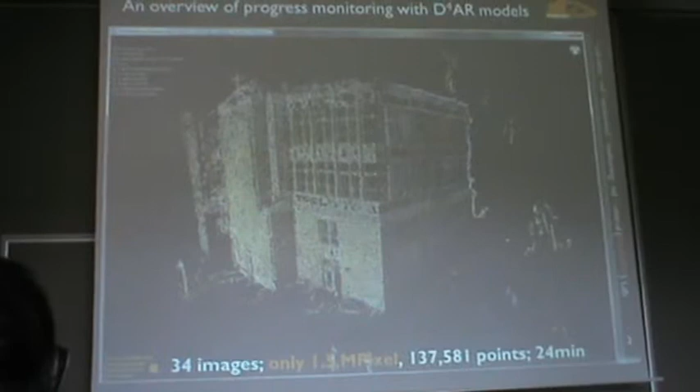What we can do is put these pictures together and give you a 3D point cloud model of the job site at the moment these photos were captured.

In this particular case, we're using a collection of about 34 images. The spatial resolution is about 1.5 megapixels. So you can imagine holding your cell phone, walking around this building and capturing photos, and we can generate a point cloud for you in 24 minutes.

Not only can we give you the point cloud, but we can exactly tell you where you took the photo from. In this case, you can see the camera frustum and the photograph superimposed on it. There's no GPS or wireless involved in this case. Everything is based on the visual content of the image.

Now the idea is to see how we can take this representation and compare it with the building information model and automatically analyze progress deviations.

I'm going to quickly speak about a few challenges that motivated this research. The specific focus of our work is on progress monitoring, and the issue we have is a pile of daily construction reports.

I'm sure all of you, when you walk into contractor trailers, this is the first thing you see: a pile of daily construction reports that contractors or construction management companies usually have one or two people analyze, to understand how much progress is being reported by different people.

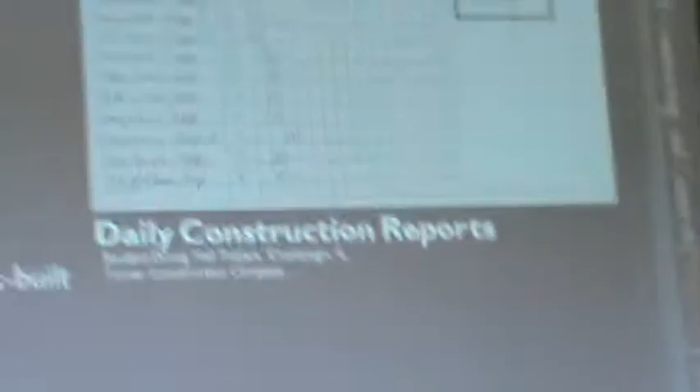Not only is the process very time consuming, but contractors aren't really providing a lot of information to us. Here's an actual example of a daily construction report provided to Turner Construction, the company I used to work for.

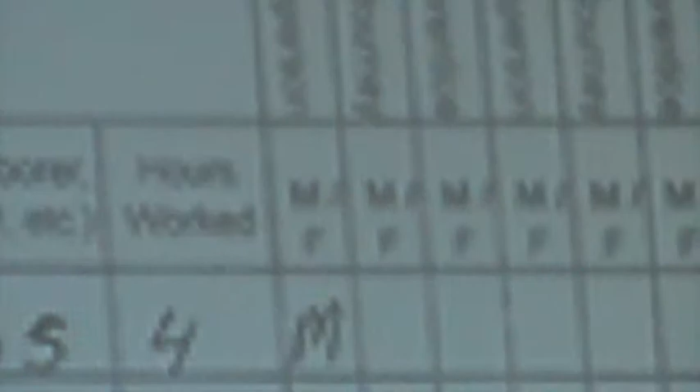In this case, the drywall contractor reported that they had been performing framing without exactly telling us the location of the framing, the cost of the work placed, or the amount of physical progress. And lastly, the way we visualize information is obviously very challenging.

In this case, we have a construction schedule consisting of 2,500 activities. You can imagine how much time you have to spend on a 3-week look-ahead schedule revision. Even the state-of-the-art representation of progress is just a discrete representation.

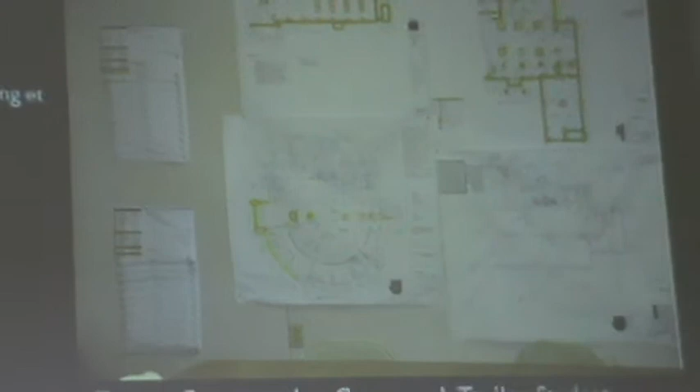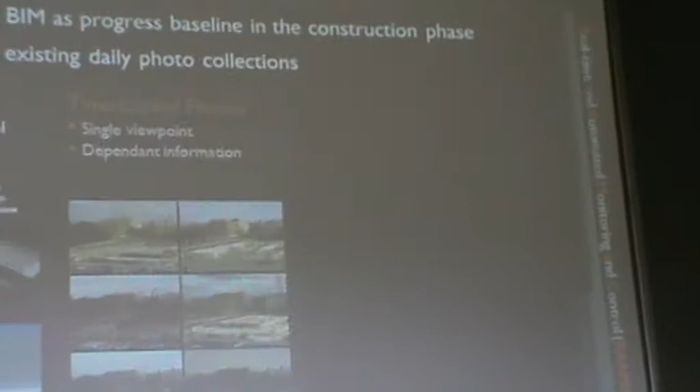Then you have the construction drawings on one side, the schedule on the other side, and there's no easy way to understand the level of progress. So the idea we've had is to see how we can use existing information on the job site without adding any new technology.

There's a lot of research being done on laser scanners, barcode and RFID tags, or wearable computers, but instead of looking into those technologies, our idea has been to look into existing information.

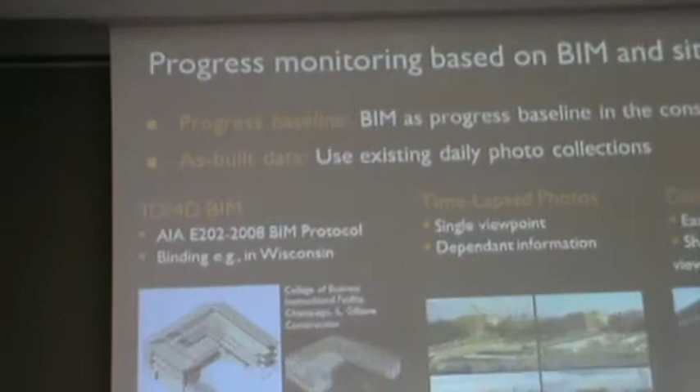By existing information, I mean application of building information models. At this conference, we've seen a lot of application of BIM for design, pre-construction, and lifecycle analysis of the building. This is perhaps another type, where it focuses on taking the BIM and using it during construction as a baseline for progress monitoring.

On the other side, we have two types of information. We either look into time-lapse photography as a technique, or we look into application of random photos, the photographs that everybody takes on the job site. So let me quickly explain the concept.

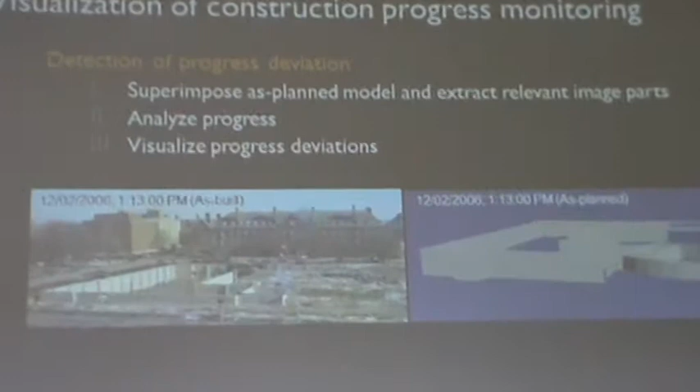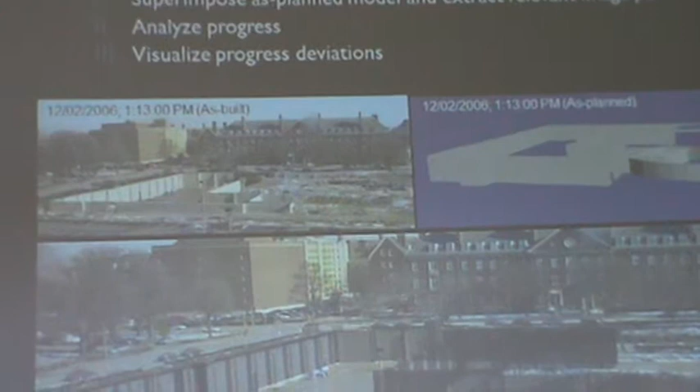Imagine that we have a 4-dimensional model where the BIM is already connected to the schedule. We want to take that model and superimpose it on the photograph collected on that particular project, and in this case we provide you with an augmented photo.

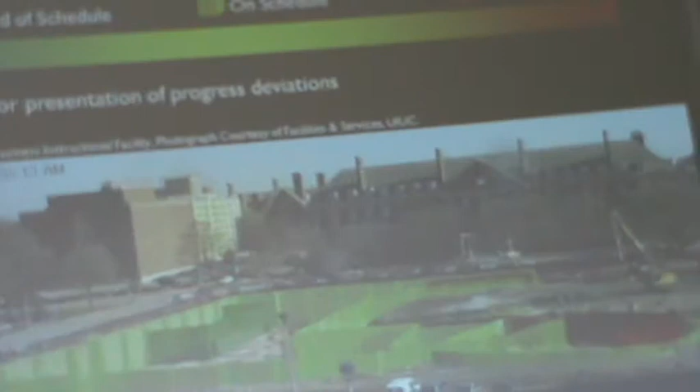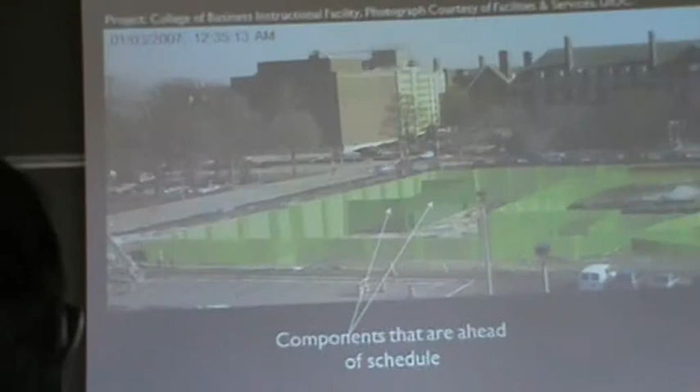Once you have the augmented photo, the idea is to go through the construction schedule and automatically analyze progress deviations based on different activities. Lastly, we give you one single representation of progress using a traffic light metaphor, color coding elements that are ahead of schedule in dark green, and elements that are behind in red.

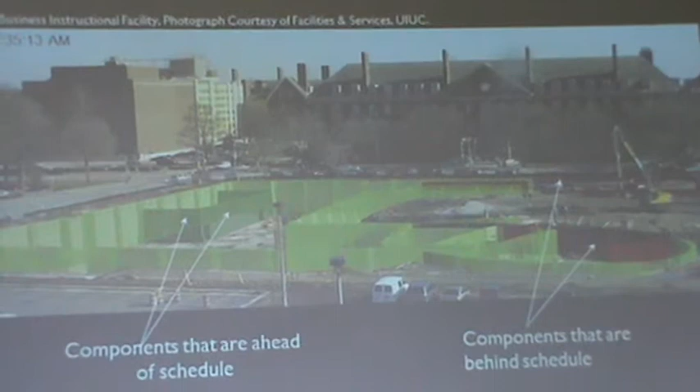When we started this topic, our focus was mainly application of time-lapse photography. But every time I presented it to different contractors, they always asked the same question: what is the cost of your technology? A time-lapse camera only costs about $8,000 to $10,000 per year to operate and maintain in the US, but it was still a concern.

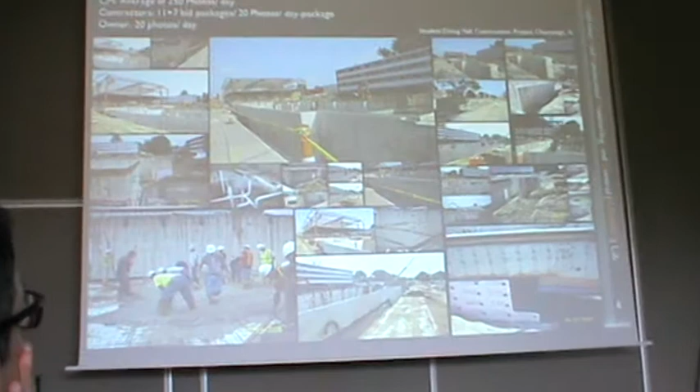So I decided to change the concept and see if I could use their existing photographs. Here's an example of the type of photographs already available to a construction management company, another example from Turner Construction. In this particular project, we were collecting about 250 photos on a daily basis, and not only were we collecting photos, we had contractors taking photos for us too.

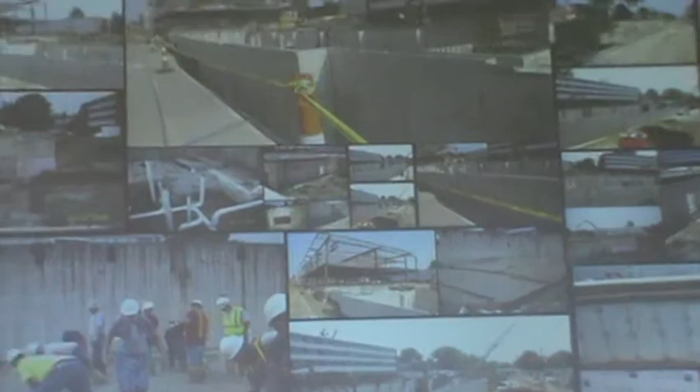In this case, it was actually a combination of 2 projects in Champaign, Illinois, with 18 different bid packages. If you assume you only have 1 team, and each team collects between 10 to 20 photos every day, you can see there are about 400 to 500 photos collected.

But actually using these photos is not that easy. We don't know how they were captured, where they were captured from, the lighting conditions, or the occlusions we have. Sometimes they're taken for safety analysis, like this one I'm pointing to right now. Sometimes they're captured for productivity analysis, or sometimes just documenting the quality of the work.

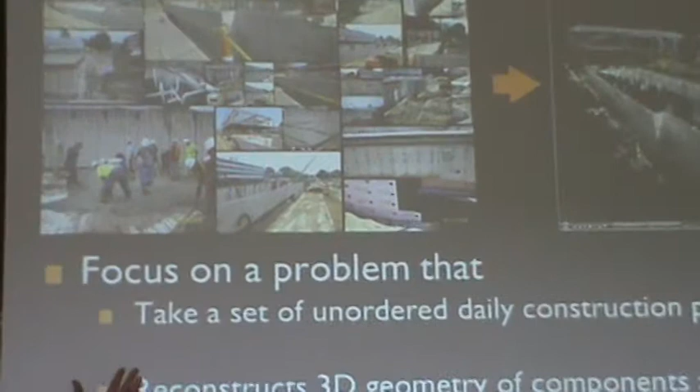So the challenge, or the specific approach we want to take, is to see how we can take this unordered set of photos, totally randomly collected, and turn them into a 3D point cloud model of the job site. Obviously, we're dealing with a lot of occlusions and obstacles because equipment and people are working on the job site, moving around and impacting our analysis.

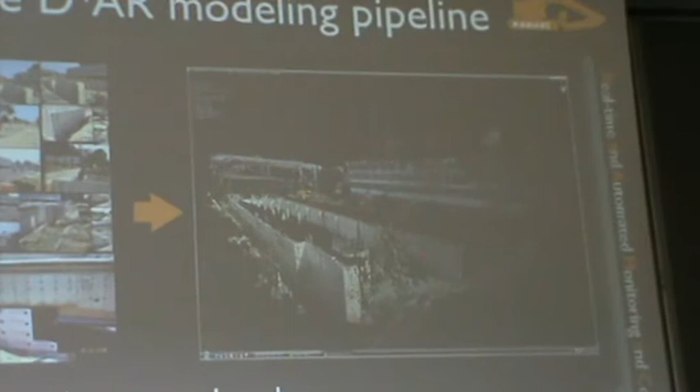So the system we've made is named D4AR, standing for 4-dimensional augmented reality, and it has 4 parts. The first part takes the set of unordered photos and turns it into a 3D point cloud model. The second component is creating and developing a 4-dimensional point cloud, meaning using photographs collected over different days to generate different point clouds and fully automatically superimpose these models over one another.

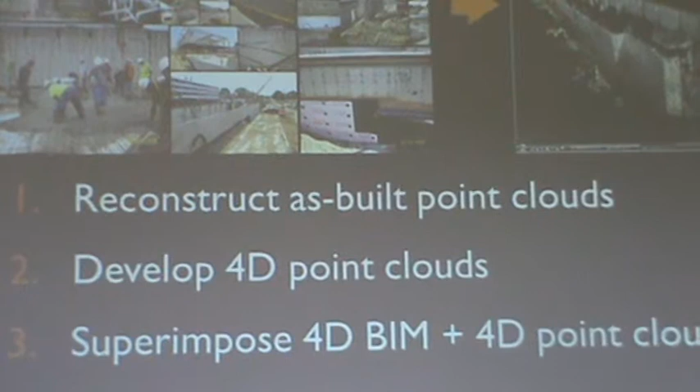The third step is to superimpose BIM over the point cloud, where the BIM shows you the expected progress and the photo shows you the actual progress. Lastly, you can automatically analyze progress deviations. So let me take it out of the presentation and show you a demo of the system.

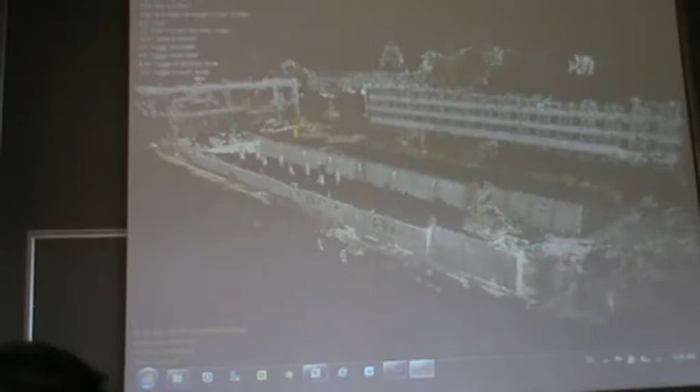Here's an example of the same site I was just showing you. This particular case is reconstructed using 160 photos, with a spatial resolution of only 2 megapixels. So you can imagine holding your cell phone, walking around and capturing these photos.

Let me walk into this scene. You can see the facade of the existing building, the construction equipment reconstructed—these were static the moment we were taking the photos. You can see the basement under construction, or even the steel structure already up for a dining hall project.

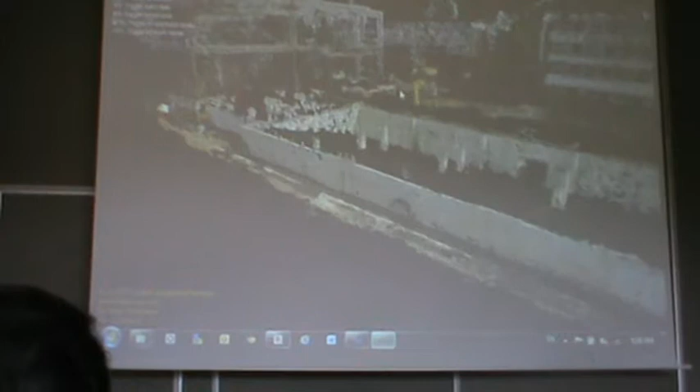Now I'm going to show you how the field engineer was walking and capturing these photos. The area I'm pointing to right now is where the field engineer started taking photos, and here's how that person was walking and capturing them. As you can see, this person is casually walking and taking a lot of photographs.

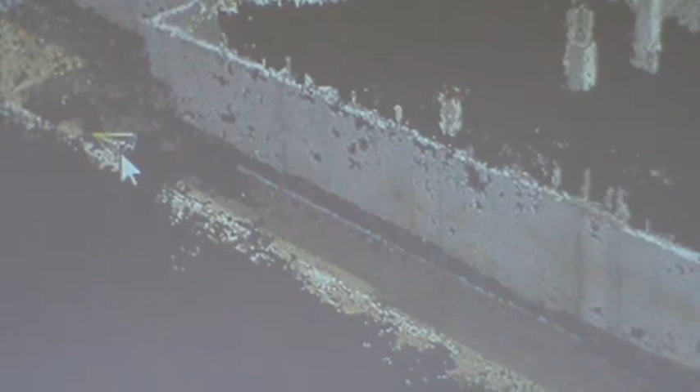We zoom out a little bit. Now if you notice the size of the camera frustum, this little thing is not changing. Here's the moment it changes—that means you can zoom in, zoom out, and capture whatever information you're interested in.

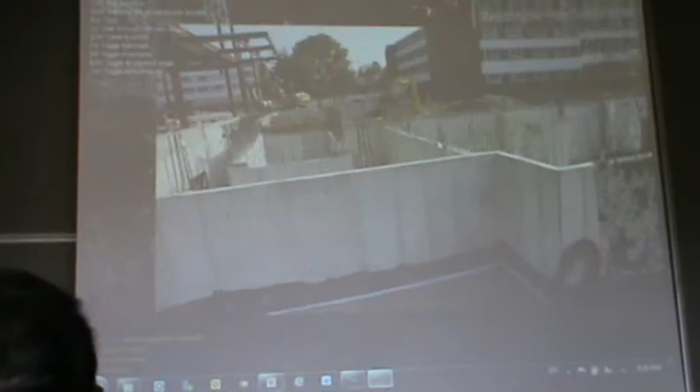You can see the facade, basement under construction, there's a tree in the back, an excavator. Everything happens to be in 3D. We can also superimpose the photograph that was used to collect it. So in this case you can see the 2D versus 3D. Now again, at any given position, you can preserve your location, turn your head around, and be able to see the rest of the site in 3D.

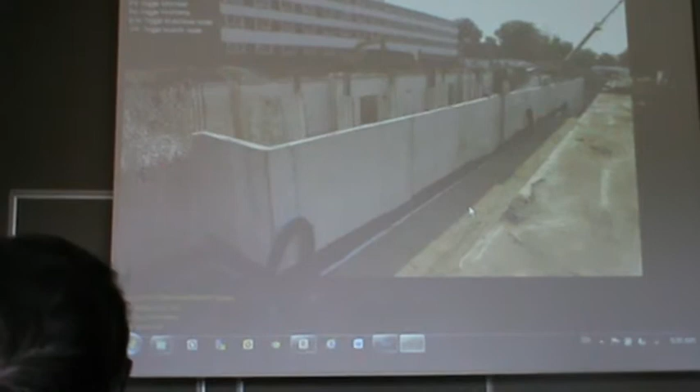Now I'm going to actually come slowly out of the camera to show you where the camera was located. And again, this is a mobile camera, a still camera in the hand of some person walking around and capturing photos. There's no GPS or wireless. So let me go back to the camera. I'm going to walk you between some of these photos just to show you how these photos have been captured. So as you can see, there's a lot of overlap.

At any given point, you can turn off the textured image, and you can see the 3D status of the site. Again, at any given position, you can turn around and see what's happening on the other side. All right, so this is the first component of the system, which is helping us to document the existing status of the progress. But as I mentioned, the idea is to automatically analyze progress.

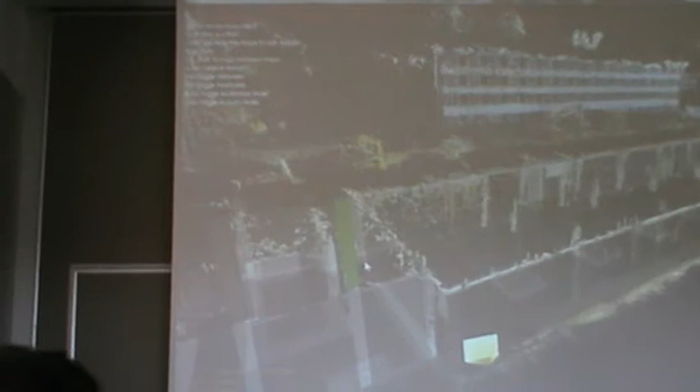So we bring a building information model. The way we are actually doing this is using IFC Engine DLL. So we've been using TNO's DLL to parse our IFC file, which was actually generated in Autodesk Revit, into our system. So in this case, we can click on any given element. You can manually have it color-coded, and at the very top part, you can query the geometrical information. Now again, if your case is, for example, for billing purposes, you can imagine cost being associated with this element and having the actual representation.

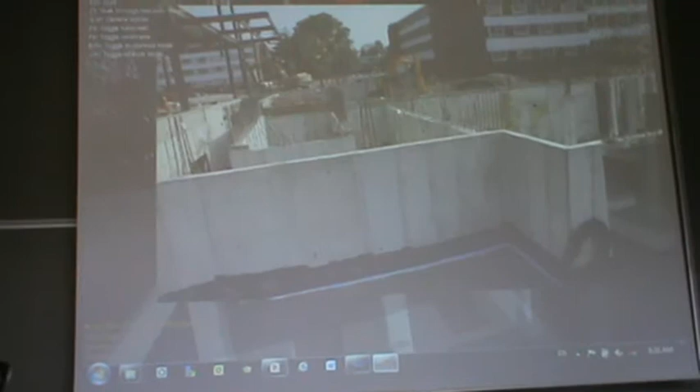So let me go back to the photo. I want to show you the site from that angle. So if you go back to the photo, you see that this particular element that I color-coded is missing. So let me go back to a 3D view so you can see the element. From the photo, this element is missing. So what we can do is we can give you a little bit of transparency. So now you'll be able to see a semi-transparent photo. Let's see if I can make it better. There you go. The point cloud, the 3D model, and the color-coded element.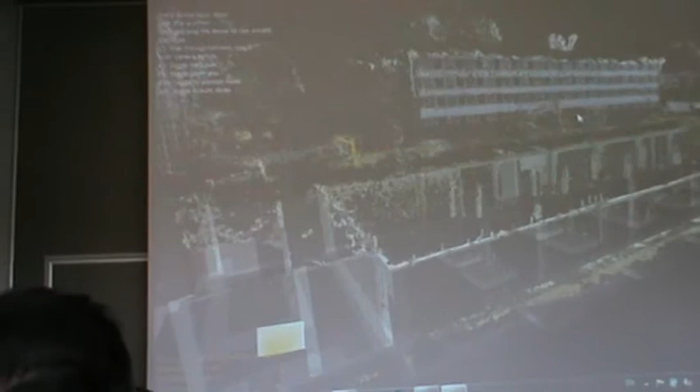Now we've taken this scene, which we call a D4AR, which stands for four-dimensional augmented reality. We've come up with a new machine learning algorithm that works based on the linear support vector machine concept and color codes elements automatically. So in this case, the elements that are on schedule are automatically color coded in green. The elements that are behind schedule are automatically color coded in red.

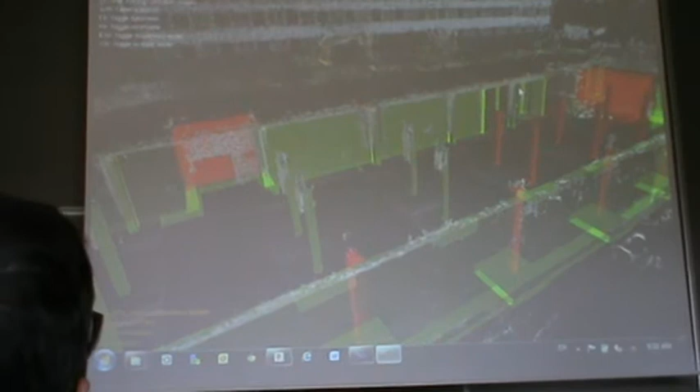So now I have a question for you. Some of these elements are not color coded. If you notice, some of them are staying in a gray color, the same color I had in the beginning. Can somebody make a guess why some of them are not analyzed when you have photos? On the ground? On the ground. When you don't have visibility to certain elements, if you don't have photos of your elements, we won't be able to analyze anything for you.

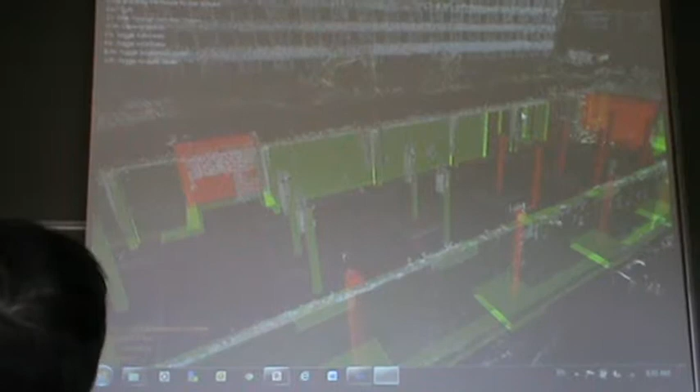So as long as you provide enough photos that give you enough visibility of different elements, we can make an assessment. So in our system, we have a technique for measuring a confidence factor. In our measurement of automated progress, we can have colors assigned when we have a feeling that we're going to get accurate results. Okay? Any question on the demo so far? Okay.

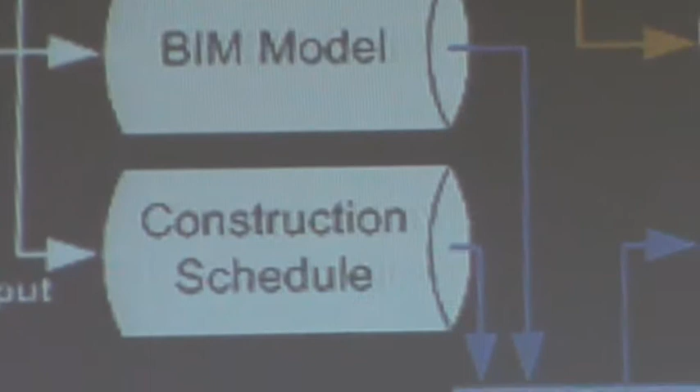So again, I'm not going to get into any of the details, but I'm just going to quickly do an overview of the systems that I showed you so far. The first part of our system uses a concept known as structure from motion to see how you can take BIM, image and a schedule and automatically analyze and get a sparse representation of the site.

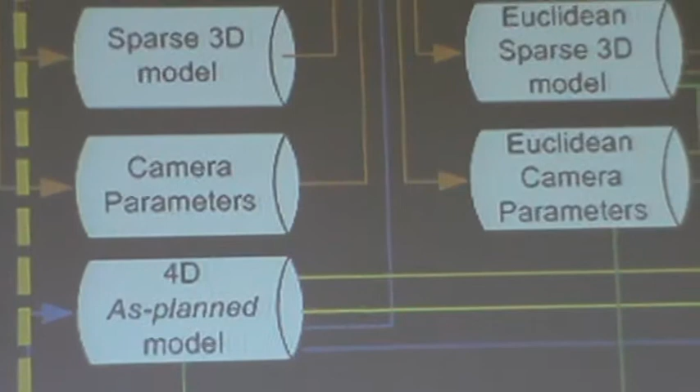The second component of our system is the process of taking the 3D model and superimposing that on top of the point cloud. This process is semi-automated. That means the user has to select a set of viewpoints from the BIM model, a set of viewpoints from the point cloud, and then we can automatically transform the model for you.

The third component of the work adds more density to the point cloud. And the last component, in terms of the analysis, automatically analyzes for physical progress, which is that machine learning algorithm. And finally, we take all this information and we visualize it for you, which I just showed you another example of. Okay. Let's move on to the next slide.

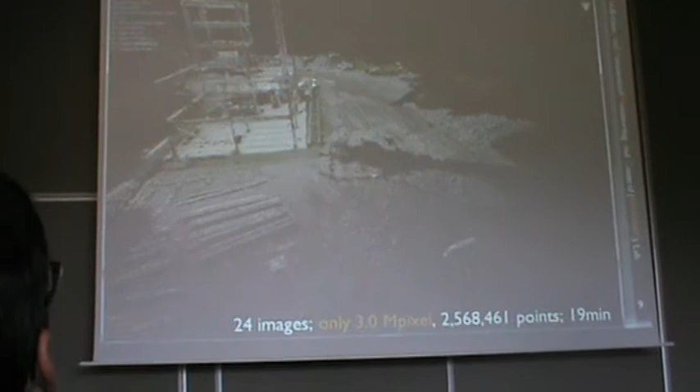We've been testing this technology for a lot of companies, and I'm going to show you the names of the people who are partnered with us. This is an example of NIST, where we engaged in this particular case just using the one component of our system that does the 3D reconstruction. So in this case, we have a steel structure. The demo that I showed you was a concrete structure. We've only used 24 images, spatial resolution of 3 megapixel, and within 19 minutes, we've been able to get 2.5 million points out of this.

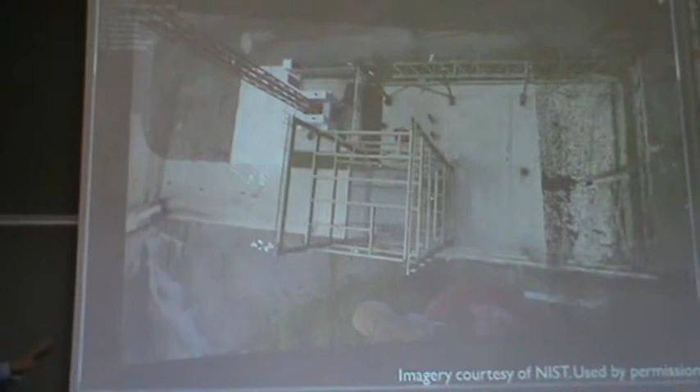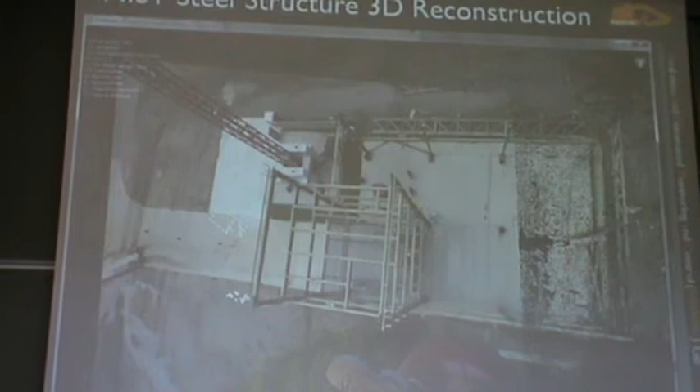Let me show you where the photo was captured from. So as you can see, there's a tower crane over here, and the photo was actually captured from the top of it. I put the name of NIST here because there's a safety issue. We told them about this issue, and they said apparently this was done in the state of Maryland, where it is okay to have somebody tied off to the tower crane and take a photo. In the other 49 states, you're not allowed.

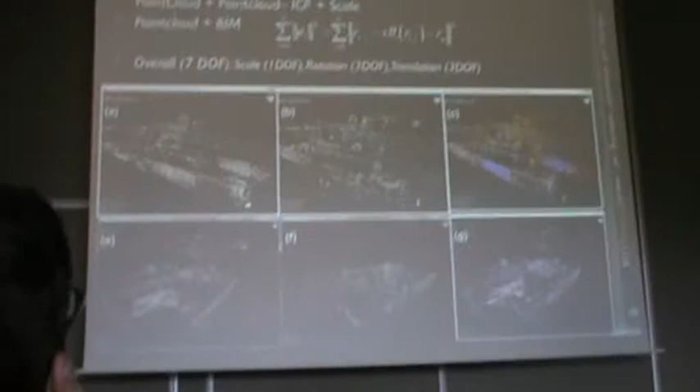In the case of BIM, now if you notice here, D and H are changed. The process is semi-automated, so we ask the user to provide us with a set of points. Now, there's a few reasons for this. First, you're using the system for automated progress monitoring, so at any given day, we don't exactly know the level of progress, so we want to leave that to the user to decide how the model needs to be transposed. But the good news is that if you register the point cloud model with a BIM once in the project, because point clouds are automatically superimposed, the rest of the process becomes fully automated.

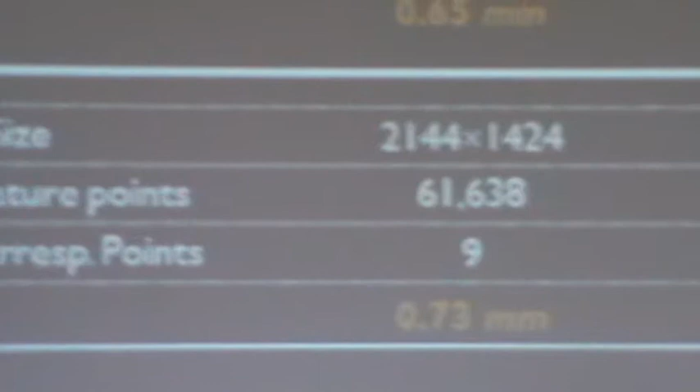Just to show you some numbers in terms of the accuracy, the numbers that we have in terms of superimposition is less than 1 millimeter accuracy. The selection error totally depends on how the user is selecting the points. The minimum number to solve this question is only 3 points. So if you provide 3 control points from the survey, we can have this done for you. But again, because the user may incorrectly select the points, in these cases you can see we've chosen 7 or 9 points to have this process done.

Now in terms of the automated assessment of progress, again, we've done some scientific study on that. Just quickly showing you some numbers. The machine learning algorithm that we're using is giving us an accuracy of 87% for training purposes, and we've only tested it so far on 2 projects for fully automated assessment of progress. In these case studies, we've got somewhere around 82 to 90% accuracy, and obviously we have precision-recall and true positive, false positive graphs.

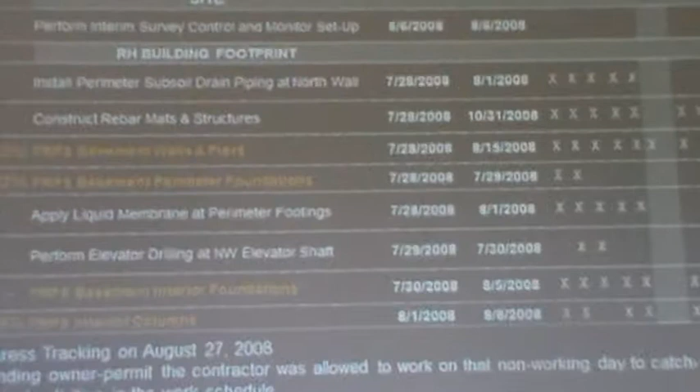Now, when you think about construction, you don't want to provide information about progress back at element level. You want to provide that information back at activity level. So here's just an example of a 3-week look-ahead schedule. For 4 different activities, we've tried to assess the level of progress. So over here you see for these activities, we have the level of progress identified by our system.

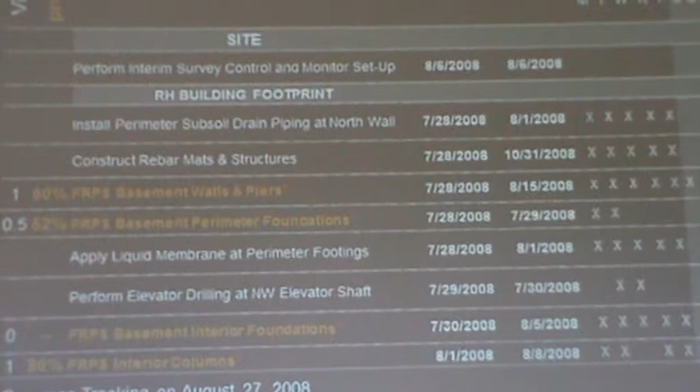But again, as I mentioned to you, because our system works based on photographs, and you may not have enough photos, we also provide you with a number on visibility. That means how much you can trust our numbers and how much confidence we have in our measurement. Now, to visually show you what those results look like, this is the example that I showed you. And here's another one. In this case, you can see the 3D model superimposed on the point cloud.

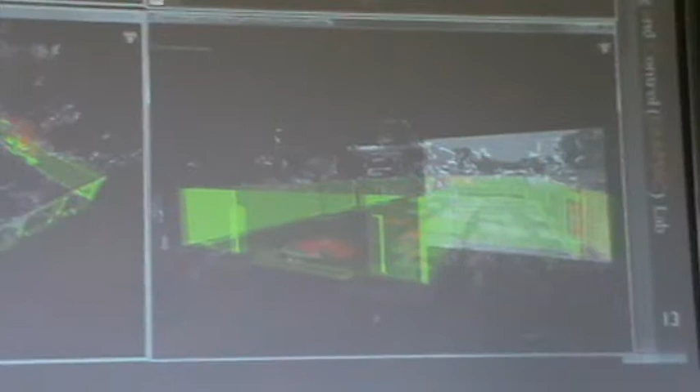We had a better accuracy, we had more photos, and the photos were all captured from inside the basement area. So obviously it ended up giving us a better detection accuracy. Just quickly showing you some examples that our system failed.

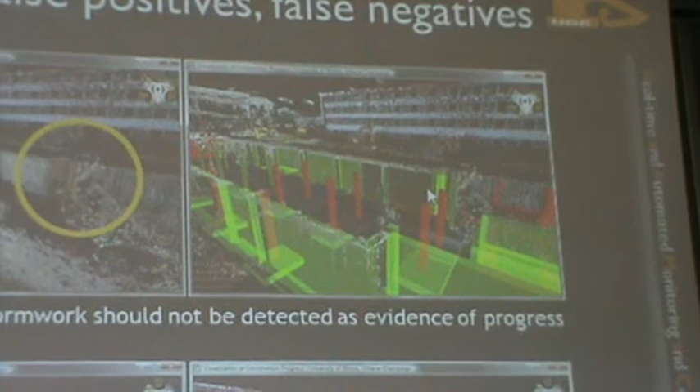One case on the top where it's a false positive. If you notice in this part of the scene, you see a formwork. So this area is still under construction, but our system has color-coded that in green. That's because our model is not using appearance-based recognition. It's only based on physical occupancy of the scene.

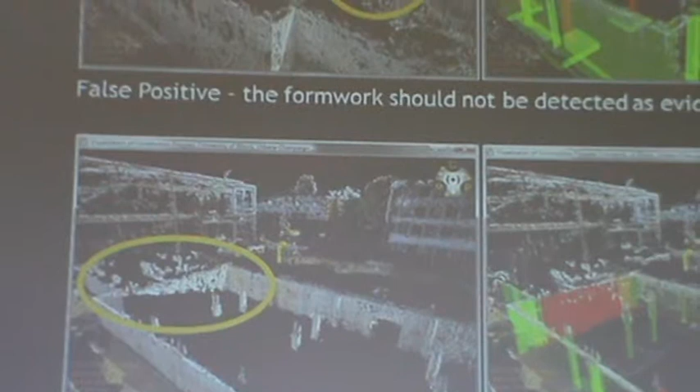Here's another example. I would like to call it mispositive, but perhaps in statistical terms it would be false negative. This area is poorly reconstructed, and the way we've trained our machine learning algorithm, it doesn't recognize that progress. So it ends up color-coding that in red.

So having said that, basically this system does a few things for you. One, it automatically generates 3D point cloud models. Second, it generates a 4D point cloud model for you, in terms of the D4AR model, and again, we've tested it for level of accuracy. The whole process is fully automated. The only part that you have to do is to superimpose a BIM on the point cloud.

We've tested it for different exterior and interior cases. I only showed you 2 examples. We can handle occlusion. Obviously, these photos are all captured from real construction sites. We can interactively color code. So if you're thinking about using this system for billing purposes or coordination meetings, you can color code elements. You can query any information about as-built or as-planned, as long as you have that as part of your BIM. And perhaps this is one of the few systems that renders BIM, photo, and point cloud together.

In terms of automated assessment, we've tested it for different types of elements and material, mainly concrete and steel structures so far. And we can handle partial visibility and occlusion. Because if you think about photos, at best, for some of the cases, you may end up having 80% visibility to a given element. Now, the alternative to our technology would be laser scanner.

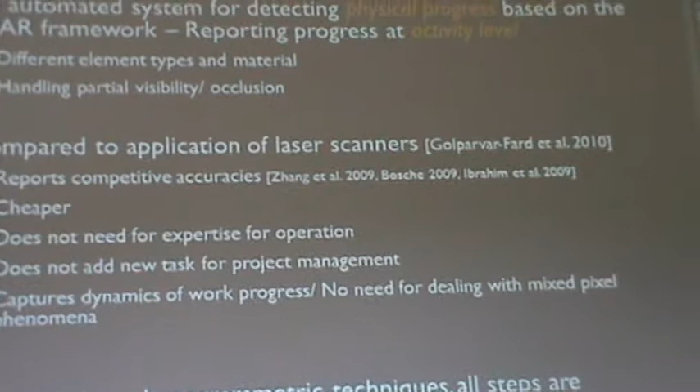We're just claiming that we're reporting competitive accuracies. We've not done a proper scientific study to see how accurate our system is. Obviously, we need to figure out what number of photographs would match up with any given laser scanner. But we can definitely tell you that our system is cheaper. If you think about the laser scanner, it costs between $100,000 to $400,000 for the device. Nowadays, it's a little bit cheaper. But again, the cost of a camera is only about, maybe here in France, 100 or 200 euros.

Now, it doesn't need expertise for operation. If you think about the laser scanner, you probably need 2 people to operate this machine on the job site. You need to provide power, and you need to be able to perform post-processing. In the case of images, you can just provide the camera to anybody on your job site, and they can take the photographs for you. It doesn't add any new tasks for project management.

In the case of barcodes and RFID that I mentioned to you, oftentimes we ask our field engineers to use those technologies to add this progress monitoring. But in this case, again, you're just using existing information. And we can capture the dynamics of the work just because we have the images that actually show where our equipment has been located. Now, you may want to contrast our work to old photogrammetry techniques. Compared to that, our system is fully automated, so given the frequency of monitoring, probably our system is a little bit more practical.

By that, I would like to just acknowledge all the companies that are helping on this project. First, I would like to start with my PhD advisors; I graduated about a year and a half ago: Feniosky Peña-Mora at Columbia University and Silvio Savarese at Michigan. The funding of this work has come from the Institute for Critical Technology and Applied Science at Virginia Tech, National Science Foundation, NIST. We've had Turner Construction support on this project. We are using this system at World Trade Center right now for testing of automated 3D reconstruction and assessment of progress. Giken Seisakusho from Japan. And all these companies that have either helped us with data collection, testing, or they're currently implementing the system.